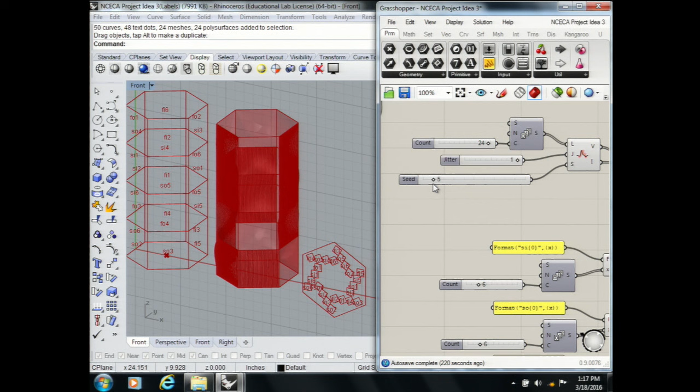So we're at number 5. This is this form. So we're going to be making that form, which is a little bit hard to see.

But then we have a little labeling system, so I'm going to yell it out to Grant. He's going to find all the pieces, or I'll help him find the pieces. The way I have it labeled is this is kind of the bottom one all the way around, and then the next level up, and then the next level up. So we can start with SO6, smooth out 6.

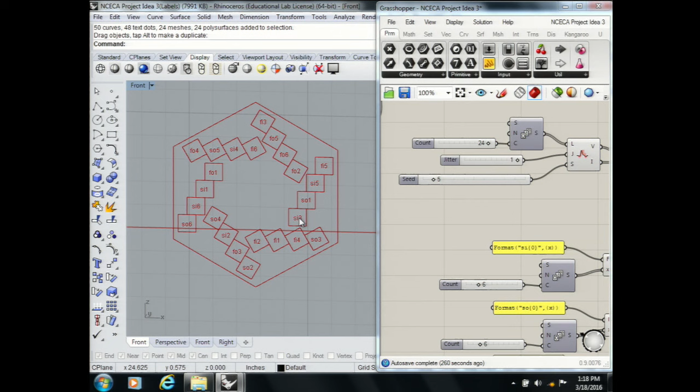This might be a little boring if Brooks wanted to talk. We're just gonna go FO4. I guess we can look at it. FI3 is the next one, then FI5. And then SO3, then SO2, then SO6 actually, if you want to grab them all.

I don't know, 6? Yeah, and we're missing one then. Oh, I'm back to the beginning. Then what did I miss? How did I miss? FO4, FI5, SO3? FI3, I'm sorry, FI3 goes right there, sorry, we're messing this up.

Okay cool, and then I'll go get the next one, and Grant will cinch that up. There's no keys or anything, we're just using those hold strap holders that we did. This is also our caddy system, if anyone wants to come see. So we laser cut this out and glued it all together, and then we even laser cut out little peg holes, and our little 3D printed piece locks right in there, and we just poured plaster over it and put a lot of Vaseline, and it came right out.

Okay so I'm going to get the next one. SI6, SO5. Get this hair out of the way. Okay so where did you start? I don't know, just make up. There you go. SI6, SO5. Oh, not this one, sorry. There you go. There we go, we got it.

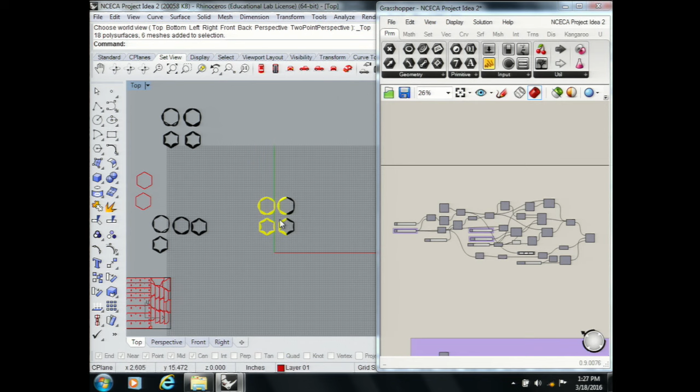Okay, I might run through a little bit of Grasshopper if anyone is interested—that's going to happen on one of these screens. I'm going to run through the definition I wrote that basically built the in and the out of those curves, so it's pretty straightforward. Was anyone here not at our talk, so doesn't know what Grasshopper is?

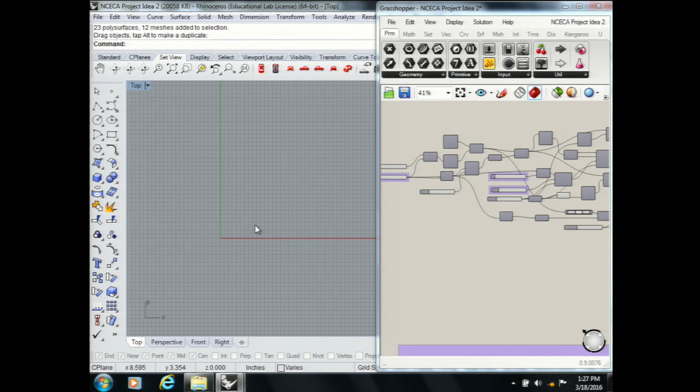Grasshopper is a plugin for Rhino. This is the Rhino space, so it has X, Y, Z coordinates. For me, I have a math background, so when I learned about Rhino it made complete sense because it was like, oh, this is like calculus—I know how to deal with these coordinates. But it's just 3-dimensional space that we're living in.

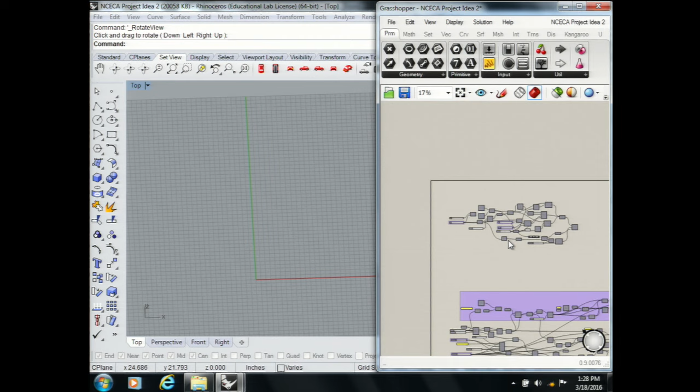But basically, I'm going to run you guys through my definition. Everything is gray in this definition over there, which means it's unpreviewed, so you can't see anything. So what I'm going to do is run through it as if I were building it afresh, and I'll preview things and then unpreview them so we can build it together.

So the first thing I did was think about, okay, I want a square, and I kind of want to push it out. Physically, I just want it to be like a piece of fabric and bend it, or a piece of rubber and push it out. But what does that mean?

This is where Grasshopper comes in, like in Rhino too—you have to start thinking about it in kind of like what Andy talked about yesterday morning, if any of you guys were there: the computer doesn't understand that. Humans are way smarter, right? We just push it out and it goes. So we have to break it down into parameters.

There's also a gazillion ways of doing everything, but one way I thought was really straightforward: I know that in Rhino you can loft curves, which means you take curves and throw a surface through all of them. So I thought, if I took 3 lines and put them right on top of each other and lofted those, that would just be a rectangle or a square. If I took that middle line and bent it out, the loft between those would be a flat face, and the middle would be bowed out. So that's essentially what I did.

I started with a point at the origin, so there's that red point there, and you can highlight it in Grasshopper and it shows up. Then I moved a point a certain distance away—this one I moved 4 inches. This is the awesome thing about Grasshopper: there are sliders, so I can slide this, and if I wanted it 14.5 inches away, it's there now. I can just move it around, and go back once I'm further into my definition and adjust it if I wanted to.

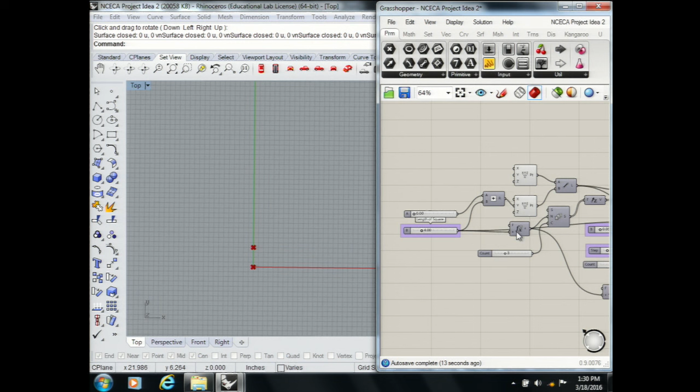So then I did that, and made a line between them. It's a little hard to see, but there's that red line living there. So there's the line, and I can take away the points now.

I don't really need to see those anymore. It's hard to see, but there's my line. And then I took it and I moved it.

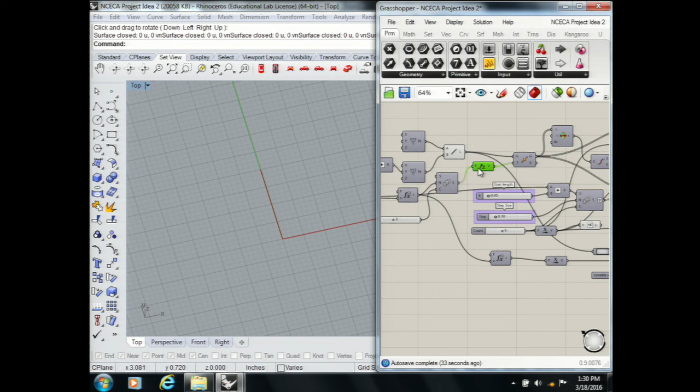This is a Z vector, which means up, right? And this is just a little series thing, three different increments. So I moved that line up by those increments. I don't need to see the bottom one. So I moved it 0, which is the same, then by 2 inches, and then by 2 more inches, so up to 4 inches.

So now this is my square face that I'm thinking about. And again, now this slider part is so cool, because I started with just that line and moved it, now when I make all of these bigger, they all go bigger and change together. And that's why you want to use Grasshopper.

I think I did make this at 5 inches, and we mocked it up, and we were like, oh, that's going to be a ton of plaster, and this thing is going to be huge. So we were like, let's just change it to 4, and it was so simple to do.

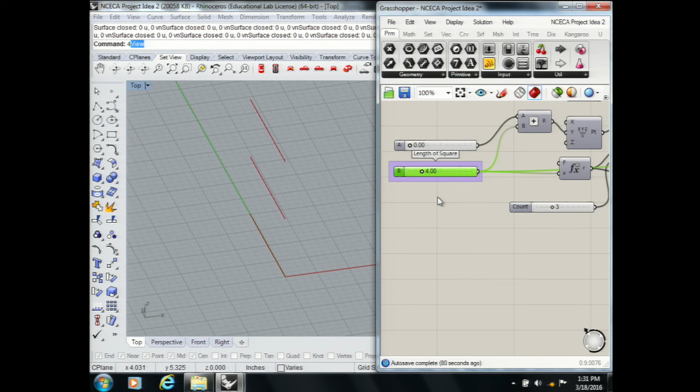Whereas in Rhino, you can do it, but you have to be smart about your workspace. Like oftentimes you forget to save things, and so then you only have your end product and you don't have all the steps in between. Which is the worst, right?

And so in Grasshopper, all the steps are there in between. And these don't actually live in Rhino. They're kind of these virtual things that are just in Grasshopper, and I get to choose when I want to put them in Rhino.

So can I ask, because I have no idea, what Grasshopper is doing? Yeah, sure. So basically it's giving you a map of the steps that you're building, and I'm coming over here to show what you're doing.

You can import, so I could actually make a curve in Rhino. That red curve lives in Rhino. I can select it, I can move it, I can do things to it, and then you can import that back in.

So if I do things, I can go back and forth too. This definition I'm building entirely from Grasshopper with nothing in Rhino there, but you can go back and forth and set geometry and move it.

So let's say I just wanted to rotate one object, but I wanted to rotate it 100 times in a row. Well, I could sit there and click 100 times, and there's tricks you can do to click and move and do that. But in Grasshopper, I could set that one object to a little node and do a rotate, and make it go 100 times, and it'll just do it.

And it'll rotate 100 times. And then if you decide you wanted that to be 99 times, you just adjust a slider.

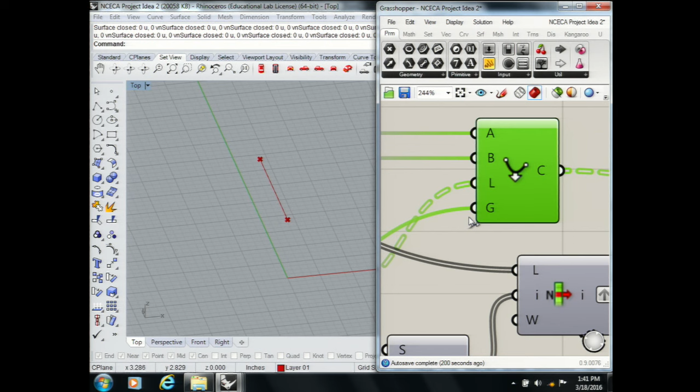This is Grasshopper - it asks for inputs. A catenary arch is actually made from gravity, right? It's like if you take a string, it's the arch that's made when a string falls. So what this is asking me is the starting point, where am I holding it, the ending point, the length of my string, and then which direction I want gravity to be. And that's what's awesome - gravity doesn't have to be down here. It doesn't even have to be at a right angle. It could be off in crazy directions.

But for me, I just want to go kind of horizontal, so I'm going to go either in or out. Gravity for me is this x vector here. And if I get confused or lost, I have x, y, z little indicators down here in the corner. So then this series thing is just giving me a count of 6.

So I'm moving in that direction in 6 steps. You can see over here what this series is giving me is my start value, my step size over, and how many times I want to step over. So my start value - if my length is exactly the same as the length of this line right here, there will be no bend, because there's no room for that string to move.

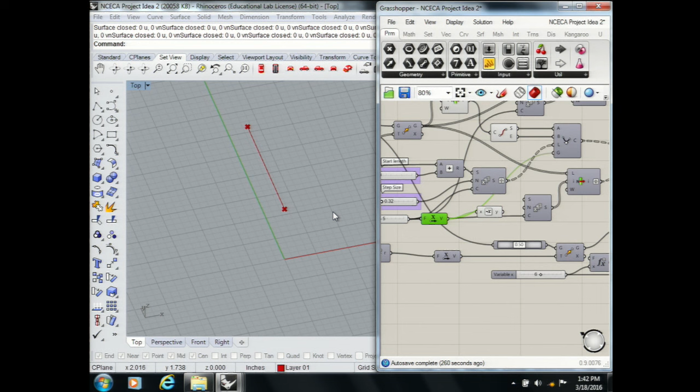So this is the plus - that input is the length of that one, plus my starting input. So if I preview these, there are my 6 catenary arches. This is the length of the starting - how much extra do I want to start with? I think I ended up doing 0.05. We ended up - but I'll show you kind of the decision.

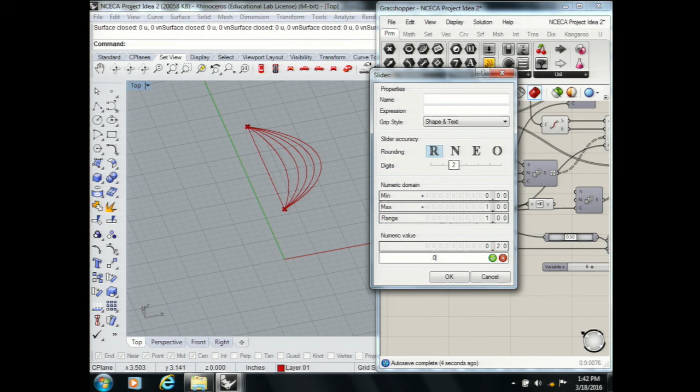And at first it's like, why did you start there? I don't know, I probably didn't start there, so we could start somewhere different. I didn't really know.

And then the step size is how much more do I want my string to increase every time, the length of it. So I can make them do really big increases, or they can all be kind of on top of each other. So you can see that this one sets that beginning one, and then this guy sets kind of the difference between them.

And so then now I have six things. I can unpreview this one to just see my catenary arches, and there they are. I think I have 6. 1, 2, 3, 4. I only have 5. How did that happen? I don't know.

Because this number is only... could you show everyone there so you can show the words for what those letters mean? Oh yeah, I don't. How do you do that? Display, draw full names. I just want people to see, you can minimize all that stuff, but it does really start to explain what these things are.

And it prompts you kind of, it's looking for this thing, so I go and find that thing.

And I had that set at 5, but I could have 7 curves or 8 curves or as many or as few as I want to. And these are the sliders. So we're going to do 6 because that's how many I want for this thing.

And then I just have this wonderful loft. So these guys are, I made 6 copies of actually the top and the bottom curves so that I could then match up those 6 copies with my 6 catenary curves and loft them all together.

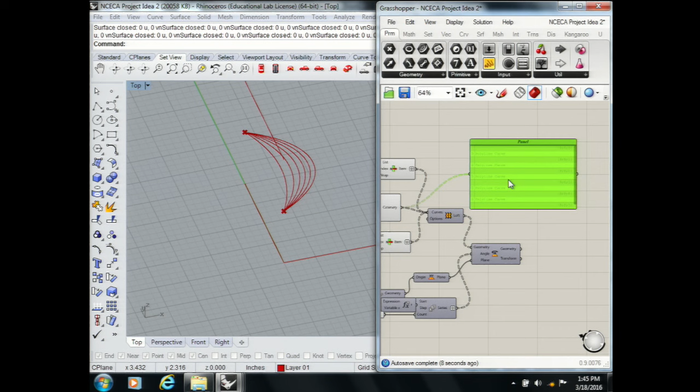And the reason I wanted to do that is because if I copy this panel and paste - and this is still something I really struggle with in Grasshopper, I think the hardest part is organizing your lists - but now I made 6 copies of those lines and 6 copies of these lines.

And so if I ungraft this and ungraft this one, see how it doesn't want to loft it, because basically now it's trying to take all 6 of these lines and loft that with the first one, and then with all 6 of the other ones, because that's how it matches up. So when I graft it...

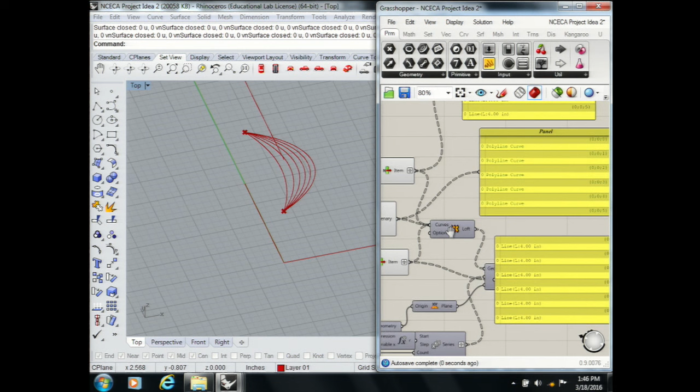Tell everyone what's the difference between a tree and a list? Yeah, well, that's kind of the difference between a tree and a list. So a tree has these different branches, and within each branch, it is a list. So you can think about it either like a matrix or a tree, which is what they're called. But I think it's a little bit easier.

We can show this too, like how there's all these different ways of visualizing. So these yellow panels just show the output. So now you can see with these three things, the output - it's now, because it takes these indices, trying to loft the first thing in this one, the first branch in this tree, and the first branch in this tree, all of those three.

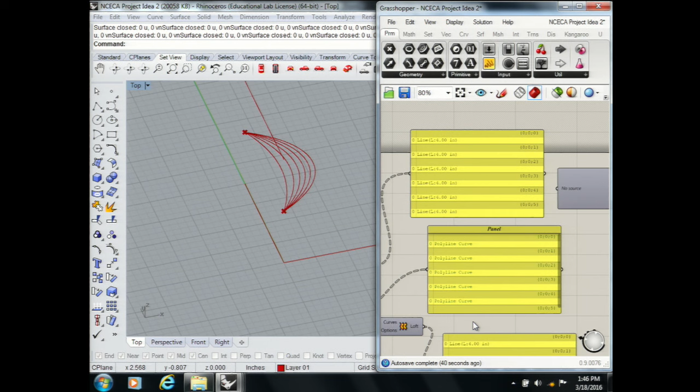Whereas if those trees and the structure of those trees or matrices didn't match up, it would get confused about how you want it to put this together. It's that same thing Andy Brayman was talking about yesterday morning, where really, the computer isn't that smart. We have to dumb it down to this really simple level of how it can understand what's going on.

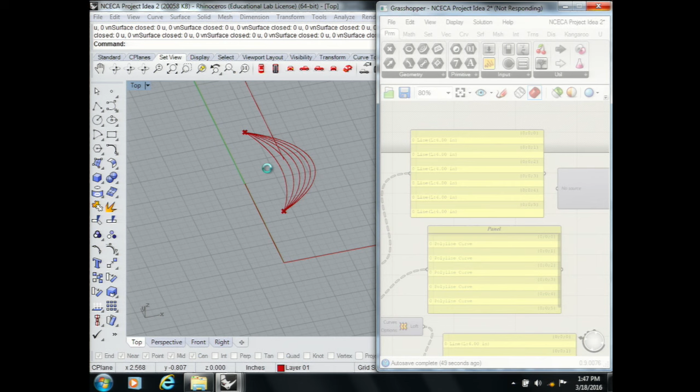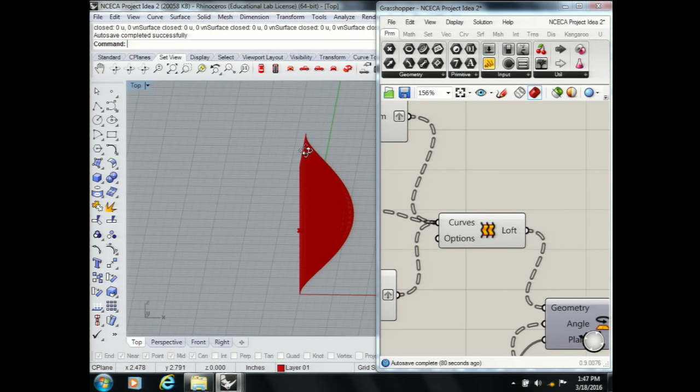Okay, but anyway, so I can delete those, that's just helping me visualize. But then I can turn this guy on, preview, and there's all of my surfaces. And it's not super helpful to me because now there's all on top of each other. It's like, how the heck do I see that? How do I understand that?

For me, the reason I love Grasshopper with Rhino is that this part kind of feeds that theoretical side. It's still things where I kind of guess - I'm pretty sure if I do this, this thing is going to pop out, but I'm not 100% sure. So it's like more than just text, but it's also more than just these nodes. It's like I immediately see what I did in a, not physical, but in a three-dimensional representation.

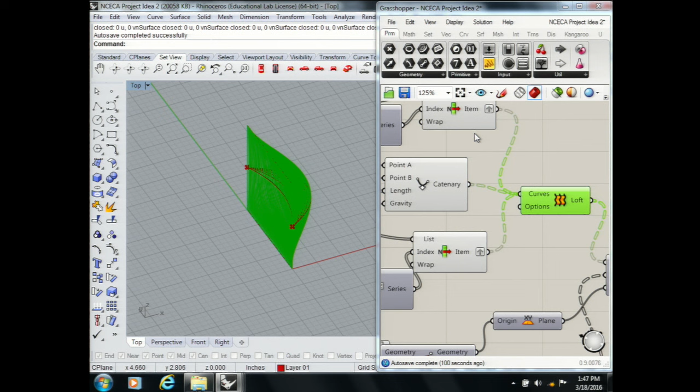So now we can unpreview all this stuff. Oops, I don't want to reverse that. Just unpreview it.

I'm going to be about ready to vacuum pretty soon. Okay yeah, I'm almost done.

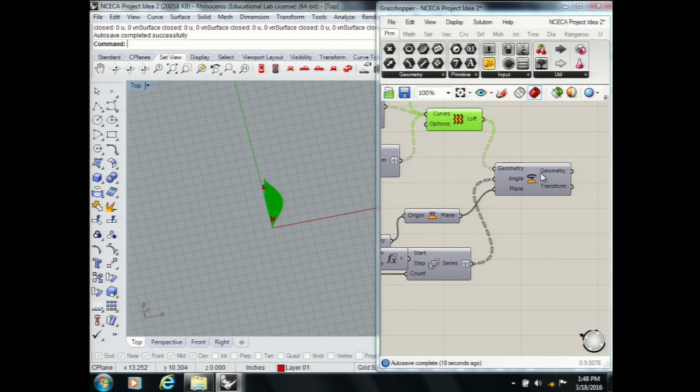And then the last thing I did was I said, oh, maybe I want to see what this mold actually looks like rotated in a hexagon. So why don't I just do that here before just guessing what's going to happen? So then I rotated all of those and I can just unpreview those. And now what this did was it took all 6 of my outdents and rotated them around. And you can look at it and say, that's great, I did it.

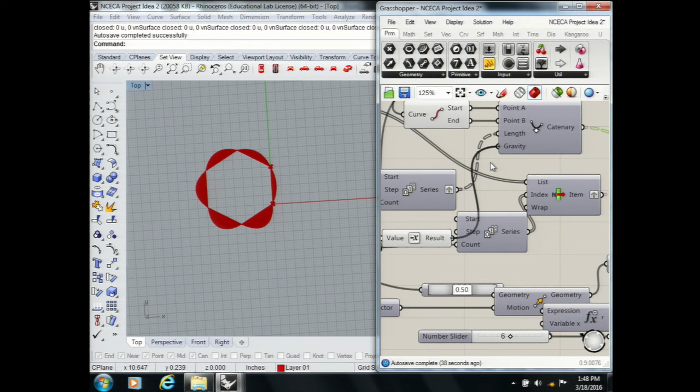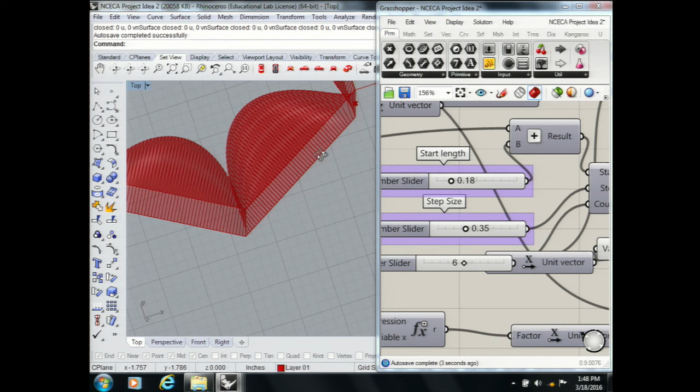But maybe you can now kind of test some physical limitations. So I was going to make some out ones, but I was also going to make some in ones. So I'll switch the direction of gravity to in. And you can zoom in now and see, oh, that's going to be a tight moment in my mold, right? If those two guys are together, that might not want to cast well, if you think about what that is. Or even if I had upped those step sizes even more, now they're actually running into each other. And that's like 2 plaster pieces knocking into each other as you try to put them together.

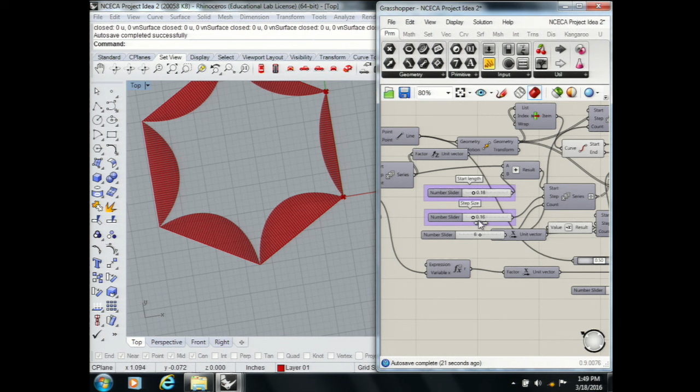So this is what I mean, I just set these randomly, I think, when I built this mold or this definition. And then it was like, this is also too where the collaboration came in, where I grabbed Grant and I was like, okay, what do we want to do practically? This has to go down, but also aesthetically. And Grant was like, oh, let's make the first one really subtle, and then it'll go up and it'll just be this subtle step size. So that was where we decided this was going to be 0.05.

And then it was like, that one still feels like too much. And then we were worrying about, is that going to suction out when we undo our molds? So this is, you do have to kind of guess. It's hard to know before you see it all. But some decisions you can make ahead of time. I think we ended up going 1/10 of an inch as the step size.

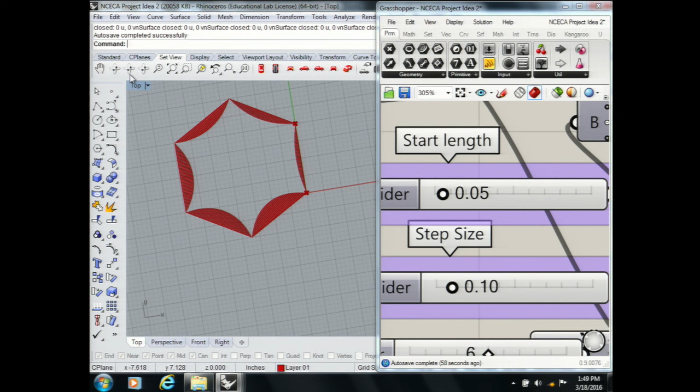And then the last step we did was you take that, and this is all theoretical. I cannot select it or move it or do anything to it. And then there's a function called bake. And you bake it, and you could send it in, I'll send it into the default layer. And I bake, and now there's a physical representation that's overlaid on the kind of virtual, not physical. It's like physical in Rhino.

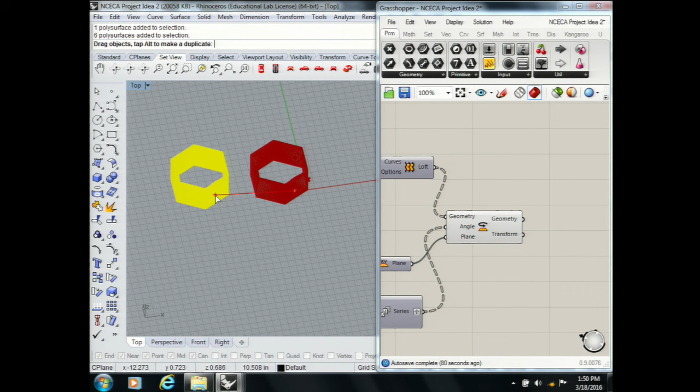It's more physical than the Grasshopper, less virtual, I don't know. But the one I can select, and so now this one is one I can do things to, like we wanted to facet it. So I could take this and turn it into a mesh. So we turned it into a mesh object.

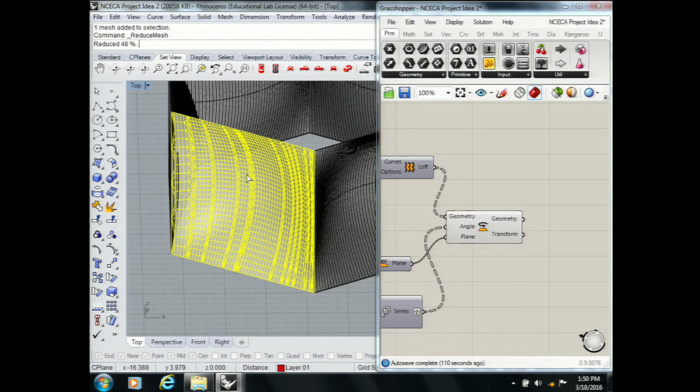And then we reduced the mesh size. So I can do mesh edit, reduce mesh, and we did 256. So I reduced it into 256 polygons, and there it is. And so now that was how we got a mesh.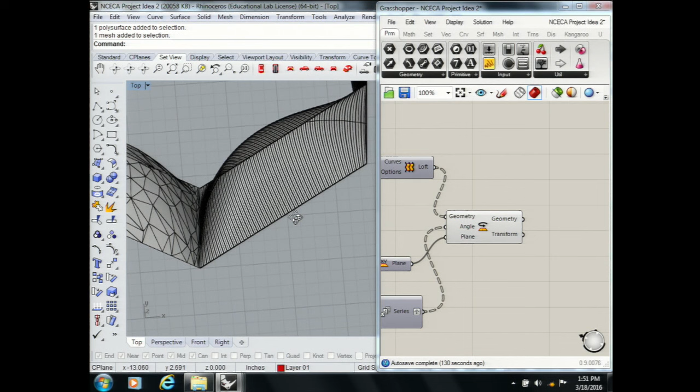And so now I can do some Rhino physical manipulations to it. When you render or model something in Rhino, you're modeling in what's called NURBS. Yeah, that's NURBS, so maybe you could explain the difference between NURBS versus mesh.

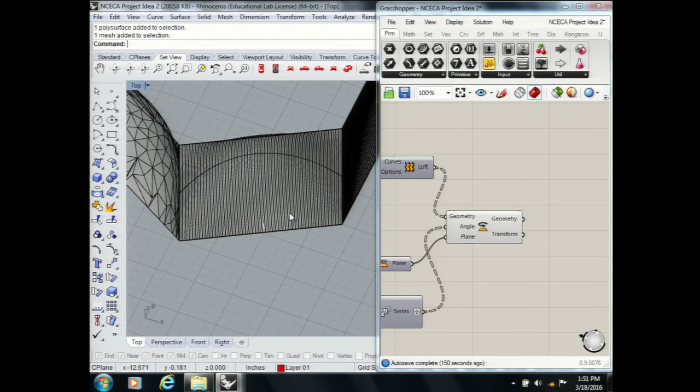Meshes are points and flat faces, basically. And NURBS stands for something with B-splines, and it uses smooth curves to map things. NURBS objects come with longitude and latitude lines, basically. This one has only one longitude line because it was made really simply, but because each of those curves was kind of complex, there's a lot of longitude lines that map it together, and then some really smart programming smooths that out, so it's really, really smooth.

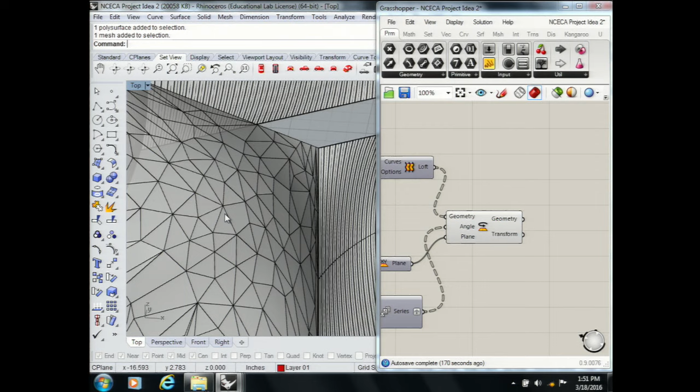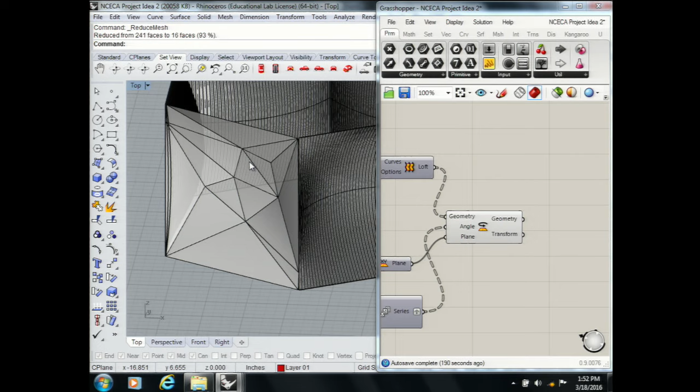And you can control that mesh and start to learn how you want to do that. You can start with just points and get to a mesh that way. I'm sure in this room we could come up with like 5 other ways I could have made that Grasshopper definition other than those 3 curves. That's one of the really awesome things about Rhino and Grasshopper, that there's just a lot of different ways to get to where you end.

And then it can get more complex. So I'll just show you really quick. Can I vacuum this out? Oh yeah, okay sorry, it's gonna be loud. I'll do that later, it's gonna be loud. Grant's gonna vacuum out our slip.

Do you want me to hold the thing? No. Here, I'll put it on the ground. Oh jeez. Best trick ever — don't, like, everyone get this thing for like $20 to add it onto the bucket. Makes it so much easier.

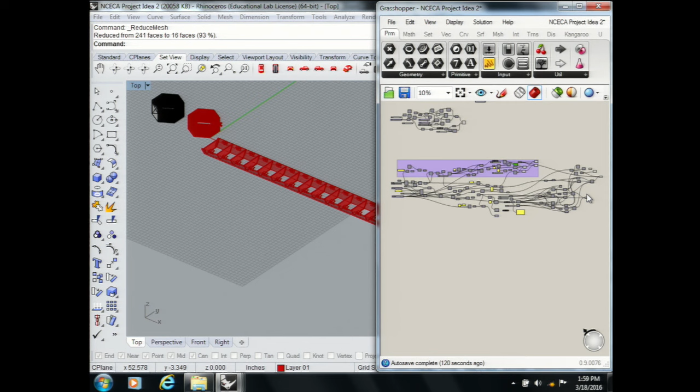This still is a relatively simple definition. Joe was telling me he uses the whole space for definitions, and I've written longer ones too, but it can get a little more complex. This whole definition, kind of a messy one, but this was how we made our cottle system. We did have one mess up where we had to redo a few of them.

You're not supposed to tell people this. Sorry, but it was true. We also ran out of our wood, so we used a different kind of plywood, and our plywood was a slightly different thickness.

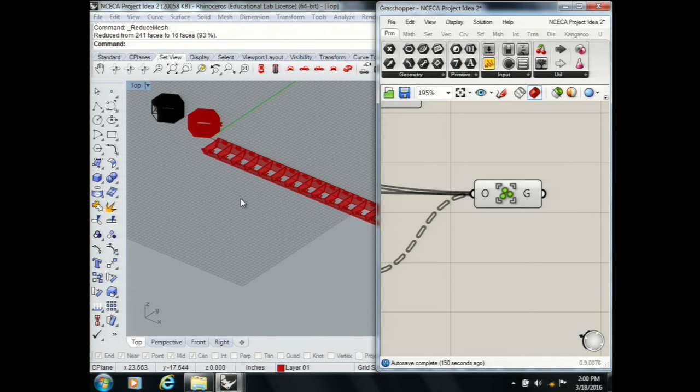We talked about how it was so important for us to model our cottle with the plaster in it exactly. If it was off a little bit, that would have been horrible. And if I had to go in and Rhino every single one of those slats and make them slightly bigger, that would have been kind of miserable.

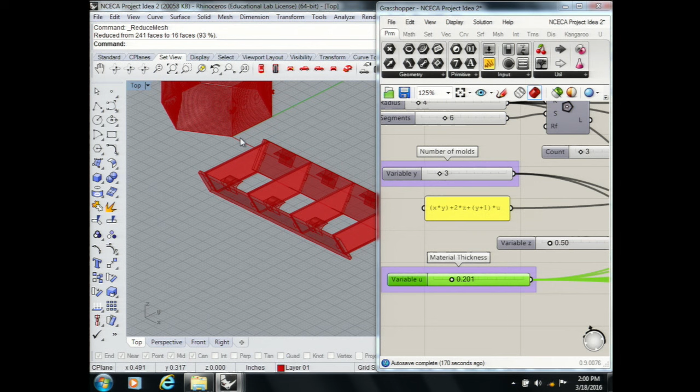So I wrote a definition where, for the number of molds, we only had to redo 3, so I hit it at 3. Then I went back and said this one was only 0.201 or something, and so I do that, and there's the thickness. I have our little 3D printed things in there so we can see how it works - I can see we made little mortise and tenons, and they size accordingly.

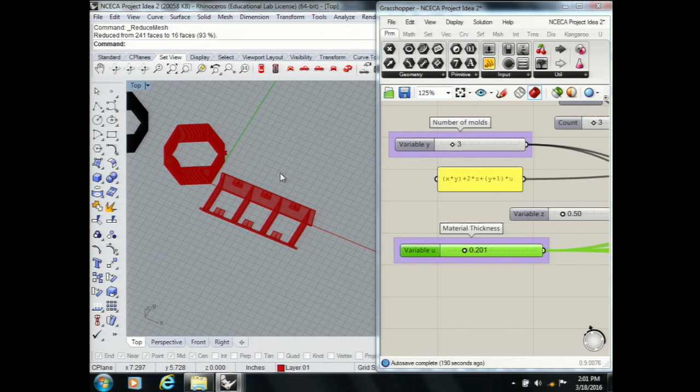Little things like that - the initial push to write this definition was probably a little bit longer, but then in a redo moment, it was very easy. Or if I wanted to redo this project even slightly different, if I wanted to change that angle, those are all sliders that can then be changed.

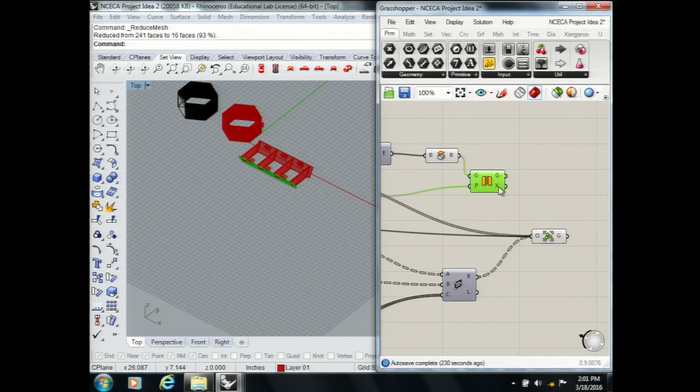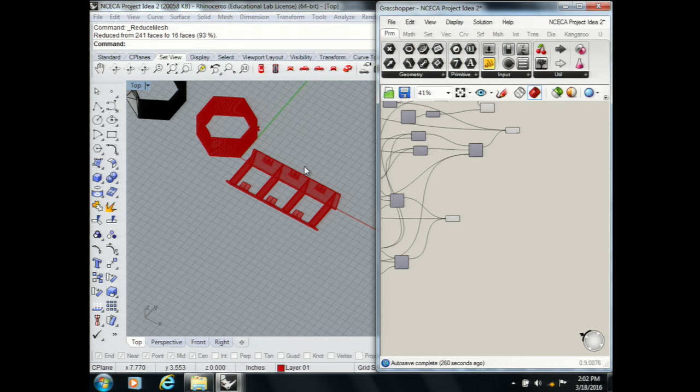That's a great question. I didn't write this into the definition because there's only really two shapes, since the two sides are the same shape, because I can flip the wood over. Each of those in-between ones are all the same shape too. This was a moment where we were rushing to get it done, and I thought, I could write into the definition that it lays flat, which I did when I made a big shelving system. It was in my definition so I didn't have to do all that clicking every single time.

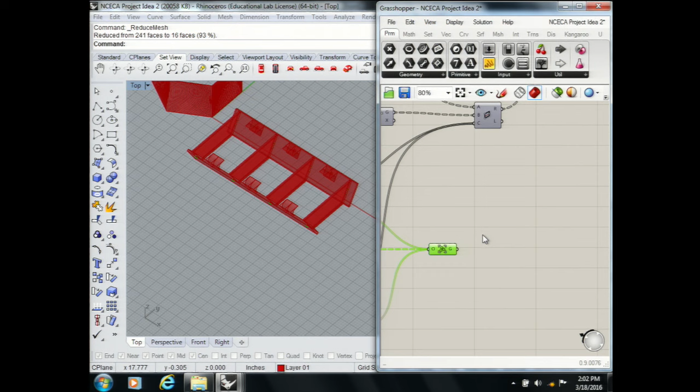So you have to go find, and again this isn't a very attractive definition, it's a little disorganized, but you have to find the curves that you want to deal with. I can't select any of these to do anything to them, but I know this is my little tenons, so I'm going to bake those. Then I'll go up to my rectangles. Let's see, which ones are those? Those are also the rectangles. I think it's these ones. No, maybe not. Oh yeah, those are those rectangles. I'll bake those. So you find the things you want to deal with. Those are the mortises.

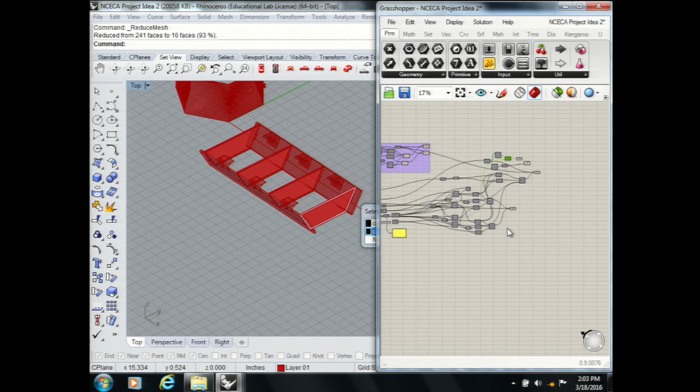And then, let's see, I think it's this one. Maybe. And I'll go over here, and this is probably a curve I would like to deal with. I'll bake that. I think I have enough.

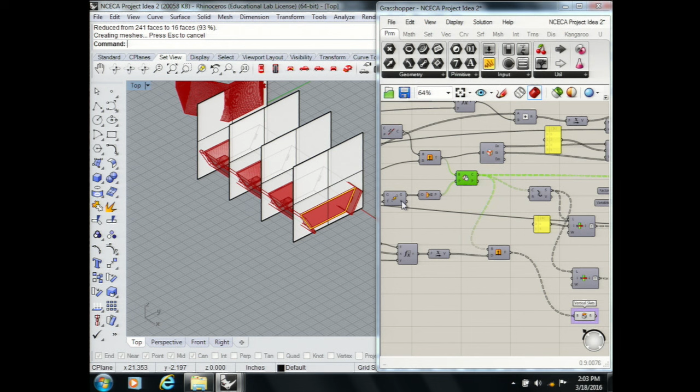Oh, that's not what I wanted. So I clicked the wrong one. What do I want to do? You clicked the wrong one? I clicked the wrong one. It happens to everyone, probably. I know you've never clicked the wrong thing and then something weird has blown up and you're like, wait, I don't understand. Hang on, I think that's it, that's what I want.

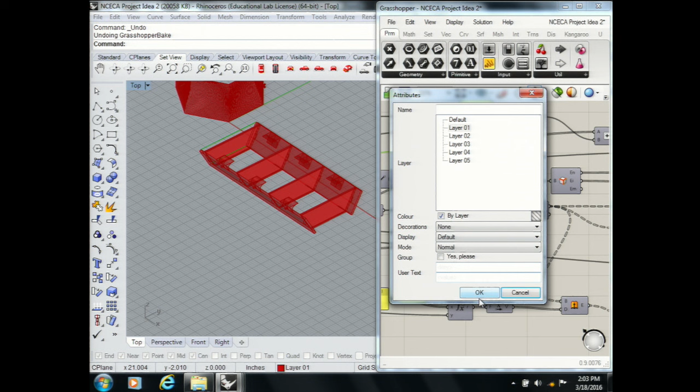And again, if this was, I did this all in kind of one sitting, it was quick. But I think I have something there now. Yeah, right, so now I can select all that stuff and just move it away.

And then now I have to figure out how to get these flat. This is where, for me, the work to get it flat wasn't so bad. I want to select this side, and this is grouped, so I'll ungroup it. Then I want those little squares, those mortises, to stay in the exact same spot, because if I grab this and move it and then try to move those rectangles, nothing would line up. So those needed to stay in the same spot. I'm going to select those and group all that together, and then I can move this.

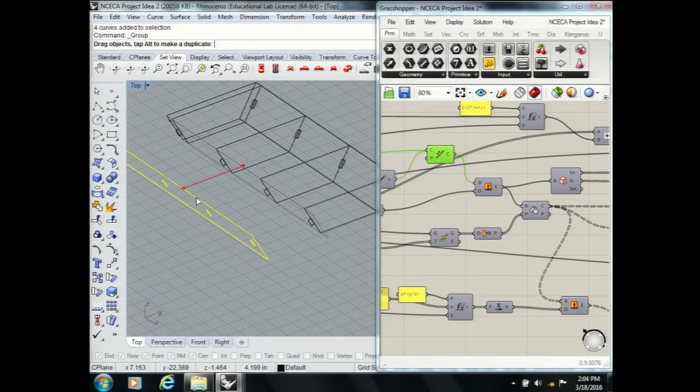I just want, oh, and I didn't do the circles, but I could have baked the circles. I want all of those to hang out. And then there's a way you can rotate. I can go into this viewport, and then I just want to take this object and rotate it around. This is the kind of fluency where I know where all the buttons are because I've clicked them many times. But that just comes with time.

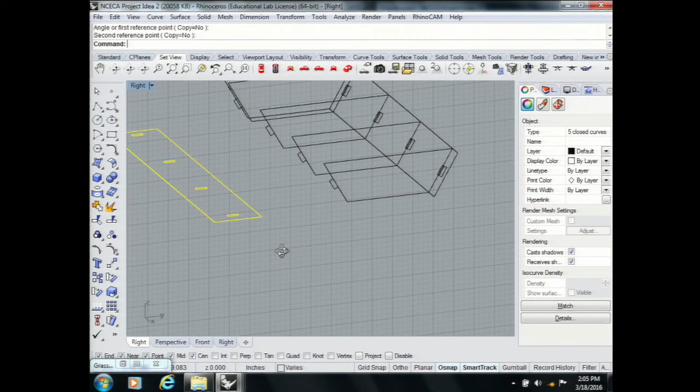And now this is a flat thing down here. And then I just export this as an Illustrator file and send it right to our laser cutter.

There's little things too, like when Grant and I both learned this when we're making waffle structures, things like mortise and tenons that need to fit need to be a right angle. The laser cutter is awesome at that. It makes a right angle. It's amazing. The width of the laser is just enough to give it a little room to fit together.

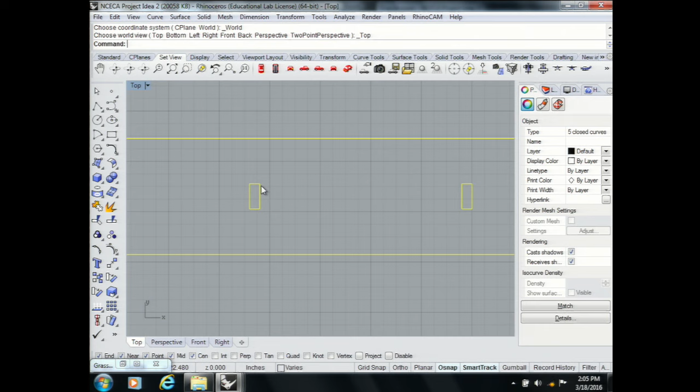But when you go to a CNC machine, you have to do that manual offsetting, or figure out the CNC - if you're using a 1/4 inch router, it'll have a 1/4 inch rounded corner there. So you have to problem solve and figure out how to make that act as a right angle. What are the solutions there?

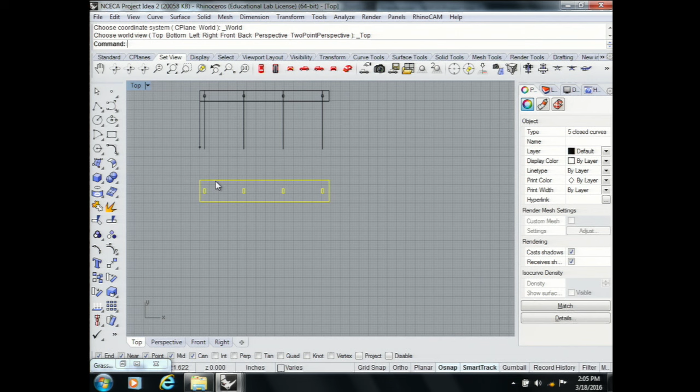A lot of times you'll see little ears that come up here that make it a right angle, things like that. But yeah, that's a great question, because you can totally get lost in Grasshopper forever and never go into it.

But Andy was showing yesterday things like there's things in Grasshopper that will bake - baking is what brings them in. It'll bake things individually and label them for you. It not only will bake them, it might not even need to bake them. You can do plugins where it just saves files, so you just click a button and it's all your different objects.

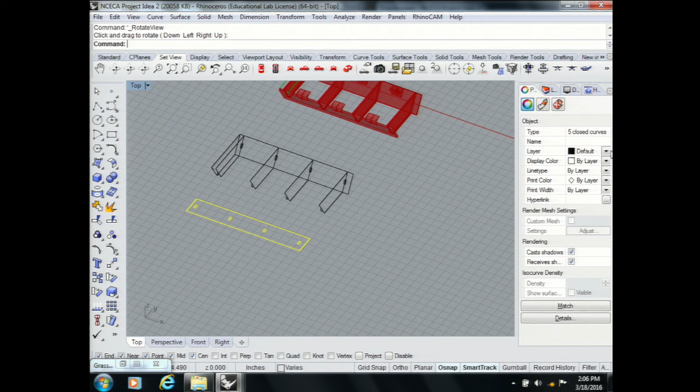So if I was smart, it'd be like horizontal ones saved in a file, I just send it to the laser cutter. Then the vertical ones saved in a different file with a different name. Andy was talking about cutting those slabs - if he's cutting 1,000 of them, you could totally see why that was helpful. I had 2 different shapes, so for me it was just grab them and move them.

Yeah, this is just like 1/8 inch or 1/4 inch plywood, I guess - a little bit less than 1/4 inch plywood. It's like 6 millimeter plywood. It's the nice Baltic birch from Russia.

Basically our fancy shop tech, Scott, told us please don't use MDF because it has a lot of glue and formaldehyde in it, and that isn't great for our ventilation.

But we have - only in California - we have 2 laser cutters. What? Only in California that stuff only causes cancer. Have you guys ever seen those warning labels? So really, it's like only in the state of California is this known to cause cancer. Oh really? Oh God, that insulating foam has that all over. Oh, because that's what I was milling in grad school. But anyway, I did not mean to interrupt. No, that's funny.

Yeah, so we have 2 really great laser cutters. We have an Epilog, a 120 watt Epilog that will cut through 1/2 inch plywood if you wanted it to, probably. It's like a 3-foot by 2-foot bed, and we cut it to size and embedded all of our pieces in there. So this was all the pieces that we wanted for ours. I just selected this and exported it as an Illustrator file and took it right to our computer that's hooked up to our laser cutter and hit go, and 10 minutes later it was ready.

Yeah, we're super lucky at CSU. We have really nice machines.

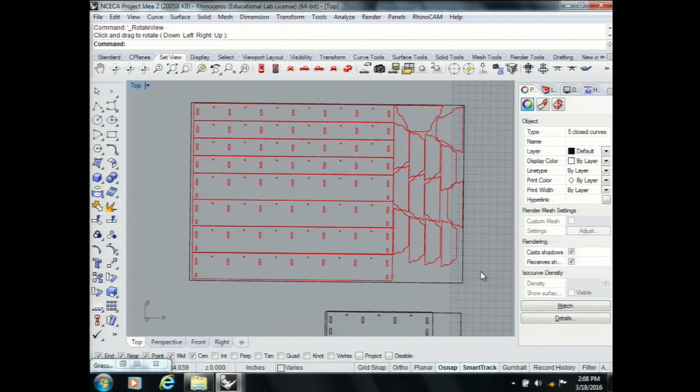Yeah, I have a question - sorry to send you another trajectory. No, that's okay, I'm just curious. It strikes me like it's very easy once you start getting into this Grasshopper that you become very lost, in a good way.

And things - I guess my analogy is like you start out with a sketch in a sketchbook, and then you go to the slab roller and you make the thing you sketched. Do you ever have an idea of a form and actually get to it really quickly, or is it always a process where once you start getting into the program, the result is always radically different than your first preconceived notion? Sorry if you covered this in your lecture.

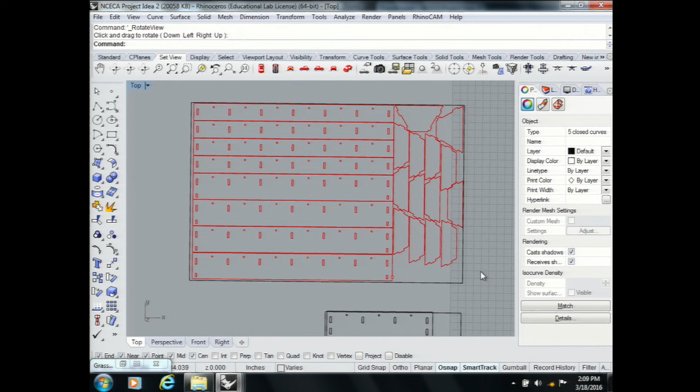No, but yeah, I'm interested in the order of decision making. And I think I use it for both - I've started using it for both. I think I started when in Syracuse before I had access to big machines or knew how to use them, I would just sketch in Rhino a little bit. And Brooks, you talked about that too, like just using it as a sketch tool. I still do that. I use Grasshopper too.

I find now that I know what it does, and I know it has that little bit of complexity or variability it can add, I'll go to it for little things.

I was talking to Todd about this. He was wanting to fillet a curve. He had 2 circles, so we could build 2 circles, and I can go into Grasshopper. I use it for both. If I have an idea like this, I'll sit down knowing it's going to get long and big, and go for it and map that out.

Sometimes it gets bigger than I anticipate. Oftentimes I'm just thinking about things and I'll use it and won't even save them because it's just 3 or 4 nodes. That's something I'd like to get better at.

I talked to Andy Brayman about how he does Grasshopper, and he makes his own little modules. You can write your own little nodes in there and save them as a node, then bring it back for a different thing. So if you're making mortise and tenons a lot, you can write a little node where you input where you want it and which angles, and it'll just do it. You can start building these little tools, kind of like tools, but you're building your own.

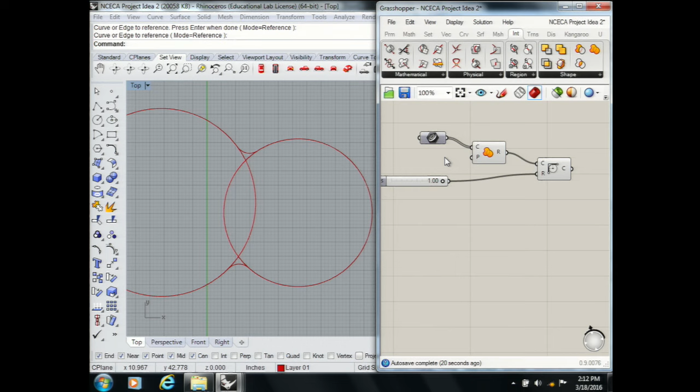What, sorry, let me just hide some things. But he was asking me, how do I fillet? I want the round between these two curves. So I showed him how to do it in Rhino, but then I said, hey, there's this really cool thing - what if you wanted to do it, like what if you didn't know what you wanted that blend to be between those?

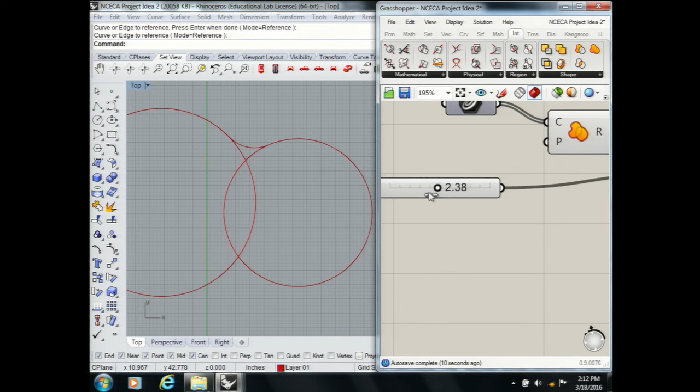So now you can take it into Grasshopper, and I can just try a bunch of different things. I can see that blend if I want it really soft or kind of sharp, and look at it that way. So I'll do that too - if I just want to check it out, even just by feel, like oh, right there, I want it there. Then I'll just bake that and go. So yeah, I'll do it both ways.

Are there other tools that people use that are just as simple, in Grasshopper and Rhino, or other than Rhino? So, I mean, Rhino's $1,000 and you have to buy upgrades, and there's tons of free software and cheaper software.

If you're at an educational license, Rhino is only $200 - well, some places will be like 95, some cheaper. And all of the Autodesk software, if you're affiliated in some way with a school, it's free. No, there are so many.

And then I recently did a workshop and we were using 123D Design. That's pretty good, it's like Rhino Light. Also, at the same time, I know I only use Rhino for maybe 20% of what it can do. But for the most part I found I was able to do a lot of stuff still with 123D Design, and that's like $10 a month or something, so it's really easy to try out. If you don't like it, just don't renew.

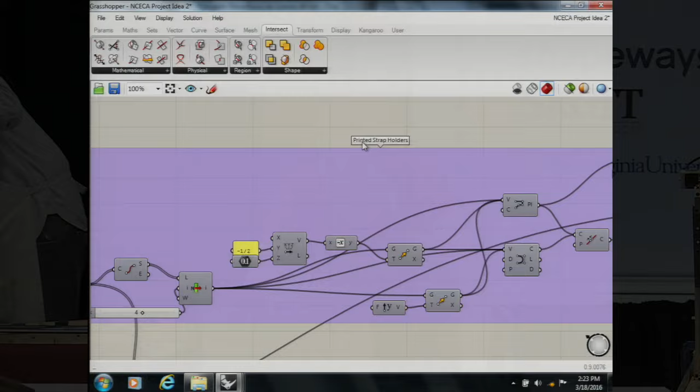Oh yeah, totally. Let's make Grasshopper big. I'll delete that. But yeah, you can label things, and I started a little on this definition, labeling like this, this is the part that's just the printed strap holder part. That was the part that made all of those. Let's see if we can open up another one, maybe.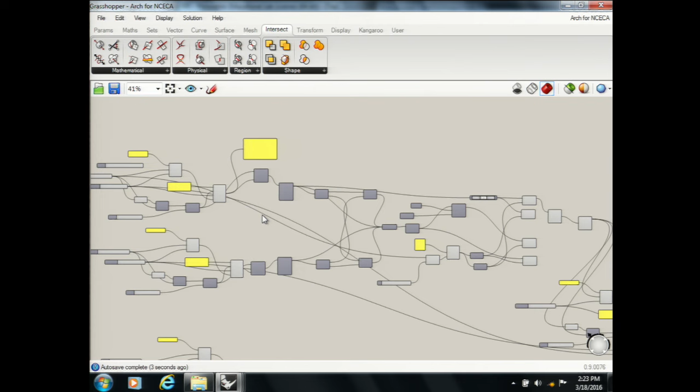Maybe that one, I'm trying to find one that's a little more organized. But that's also what I was talking about, that's something I don't do well. My studio practice is not super organized. My studio is always a mess, and I tend towards that. It definitely takes a lot of consciousness.

I'm trying to, this one's a little bit better, trying to organize. So yeah, you know, this one, it's like that's what this part is doing. But this is what I was talking about.

And you can condense that. So I could condense that into one module that has different inputs, and then I can save that. Then if I want that same operation in my next one, I just bring that in. That's something I'm kind of working towards.

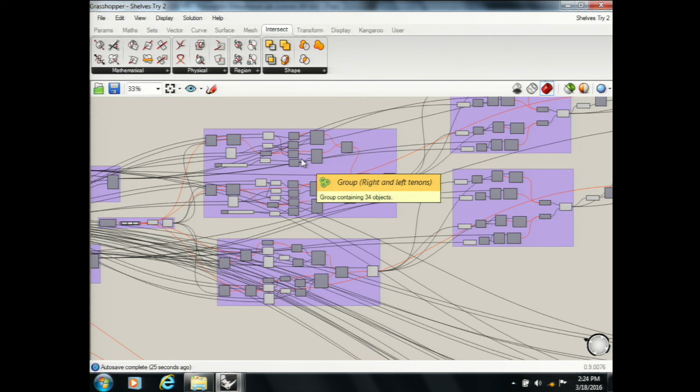Talking more to the software process we have, let me tell you the parts I understand so far. Grasshopper helps automate the creation of lines and curves in Rhino. And then in Rhino, you export it as an Illustrator file. In your case, that was a flat Illustrator file.

But in another case, like for the curved pieces, what are you exporting? Rhino will export in lots of different ways - STL or OBJ, or DXF, which is what it would export to most CAD programs.

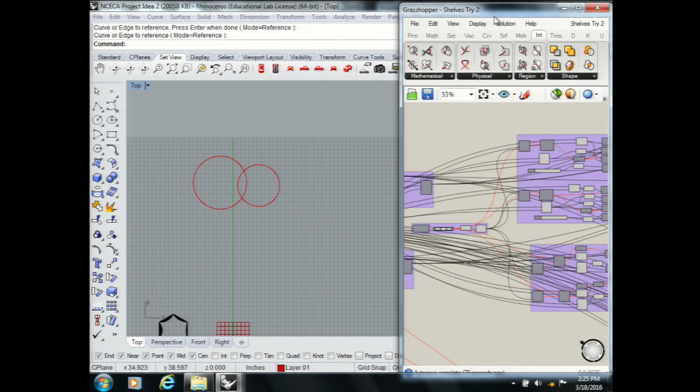But to get it to mill - we're using a CNC mill, just like that one - you need some CAM software. So this is called CAD software, computer-aided design, and then you need CAM software, computer-aided machining software. CAM software can be cheap or expensive. Rhino for an educational license is $200. Rhino CAM is its own CAM software.

The professional version, which I think boat makers maybe are using, the really heavy duty one, is like $10,000. It's pretty expensive, but it does a lot. But Rhino will talk with other CAM softwares too.

So then you need this CAM software, and you run it through that, and do all the settings where you tell the mill how to mill your piece, and that gets exported as G-code. Keith is writing his own G-code because it's kind of DIY and can get complex, but this one is just moving in these curves over and over again.

So he's writing his own G-code for that, but you could imagine if you're milling a complex form and you don't want it to run in, and you have this bit size that has to interact with your geometry, it gets very complex. So it's just a different piece of software that interacts with that. But for a two-dimensional thing, Illustrator is fine.

Anything that generates a vector, anything that's vector generated, and it talks well with Illustrator. You can build in Illustrator and bring it back in. You can build things in other CAD programs and bring them into Rhino.